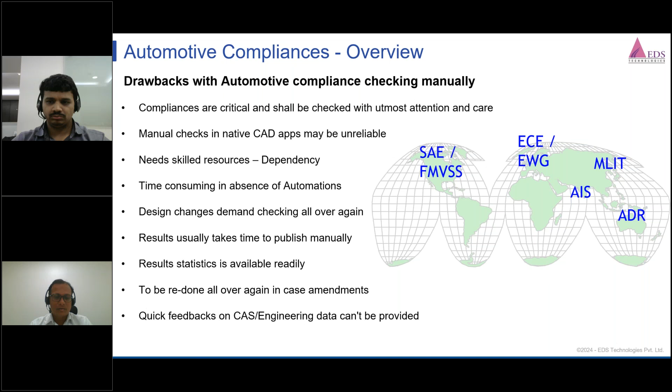Next are the bumper, hood and fender regulatory zones for minimum radius checks. Then we have vision, interior vision and mirror vision requirements in CAVA. And we also have wiper at the top. So CAVA can have all these checks right from the beginning up to the homologation stage. CAVA can support you with different modules, of course.

CAVA can really start from very early phases of development, like from the layouting stage, when you have just SGRPs and layouts of the vehicle, and you have just CAS arrived, and you want to give some early feedback to the styling team, or maybe the engineering team, the supplier team, or the safety team, whether the CAS is really compliant or not. So CAVA really starts from that phase, and it goes up to the homologation phase. It can support you all the way up to the homologation phase.

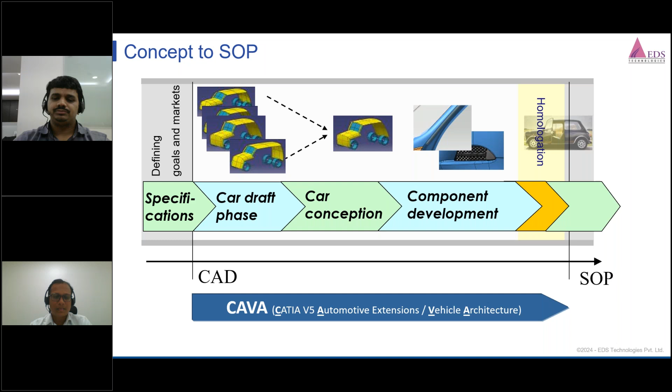As I said before, CAVA has different modules to cover the different areas and the many critical regulations. So first and foremost, what we are going to see now is the CAVA overall vehicle architecture. CAVA has amazing features for architectural designs, which we'll see in the next couple of slides.

So here's the road clearance surface, which comprises the basic surface that you see in the yellow wireframe. That is readily available in CAVA with just a few parameters, and this can be an excellent source of input to many underbody engineers, for example, the harness team and also the underbody team. We have built-in SAE templates for mannequins, which you can place on the SGRPs of the front and rear passengers. You can really study a lot of areas like knee room, leg room, head room, etc.

As I said, mirror vision, rear view vision, is one of the capabilities of CAVA. CAVA can literally certify on the go whether, with this size of the mirror and those adjustments, your mirror is really compliant with the regulations or not. Then there's close range visibility, which depicts test specimens, test cylinders, moving around the vehicle, and it can specify whether they are visible from the seated positions or not.

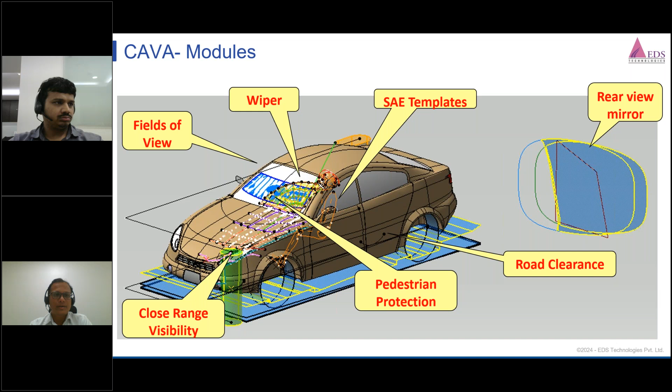Then it has field of view, which is where the whole vision criteria and vision classification starts from the vehicle interior. So it can plot a field of view directly on the windshield. From that, you can also simulate wiper regulations directly on the windshield. And of course, from the exterior side, we have the pedestrian protection feature, which can plot a lot of WAD lines, wraparound distance lines. It can also give you the pedestrian offset zone, which can be very helpful for the underbody engineers.

With this, let's move ahead. CAVA is equipped with a lot of built-in national and international standards. And recently many AIS standards were also implemented in CAVA. We have the Federal Motor Vehicle Safety Standards for the North American region. Most of the Europe region is covered with the ECE standards, MLIT, the Japanese standards, and of course the Australian regulations are there.

To name a few, here are some samples of which regulations apply to which components: rear view mirrors, seat belts, bumpers, some mannequin tools like ellipses and head forms, field of view, head impact. We'll see them one by one as we go forward.

So CAVA is built on one architecture. Performing CAVA studies in the digital space basically starts with CAVA base data. We declare some parameters in the very early phase of the studies. After the base data is created, we subsequently start the further studies, be it OVA, vision, mannequin, safety or wiper. So creation of base data is the first and foremost important thing to start the CAVA studies.

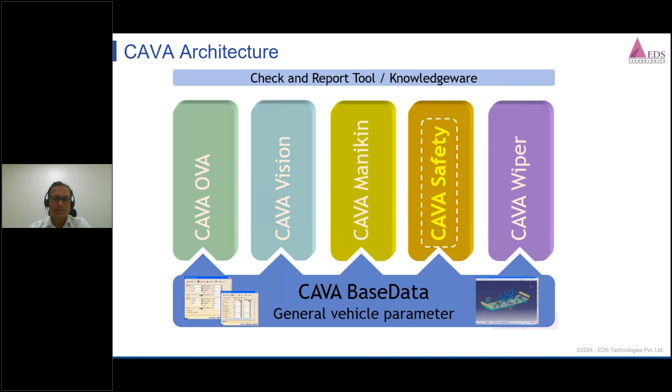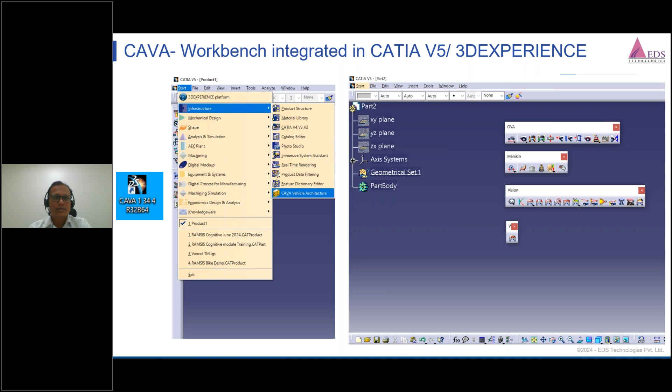Interesting side: how does the CAVA workbench look? This is a CATIA integrated version. CAVA is integrated in CATIA and also in 3DEXPERIENCE; that integration is available at the moment. The far left is how the CAVA icon looks on your desktop. The second image is where the CAVA workbench can be located in the workbench tools. And this is a typical CATIA V5 workbench with CAVA toolbars available. That was a brief introduction to how the CAVA workbench looks. It is not very different from the CATIA workbench, of course.

Let's talk about the CAVA base data. With CAVA base data we can start the creation of the actual studies. We start with base data creation.

For base data creation, we certainly need some important architectural inputs. Not all, but a few are certainly needed. First and foremost, whether it is a passenger car or off-road vehicle, that declaration is really needed. Then you need front and rear wheel center locations in vehicle space, and tire radius and tire static radius are required. Gross vehicle weights, curb weights are required to be declared, not absolutely mandatory, but good to have. Then seating reference points, accelerator heel points, seat travel, and pedal reference points, or ball of foot, that is required to be declared. And seat back angle is also required to be declared at the beginning.

With this base data creation, we move forward and perform individual studies in CAVA. First is the vehicle overall architecture. Before we jump into the detailed technical discussion, let's take some use cases, typical safety cases where CAVA can support you and how to do better engineering. So let's run the first one.

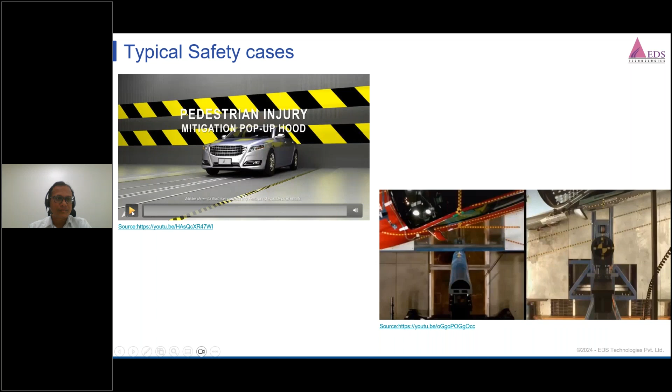It is actually about so this is the active hood and the pedestrian injury.

How the pedestrian leg impact, knee impact, and head impact for the adult is performed. This is a realistic demonstration, but the same can be done on CAVA. So here the presentation was with the active hood. There is a possibility in CAVA to simulate the active hood capability also.

In the second case, we will see how the

side pole impact test is happening here for the two competitor cars, and the structural performance is checked. The takeaway point is that the location of the impactor with respect to the vehicle SGRP point is very important, so that CAVA can support you by showing where the impactor and the pole are located in the vehicle space, so that the structural performance of the door shell and the door intrusion beam can really be ensured.

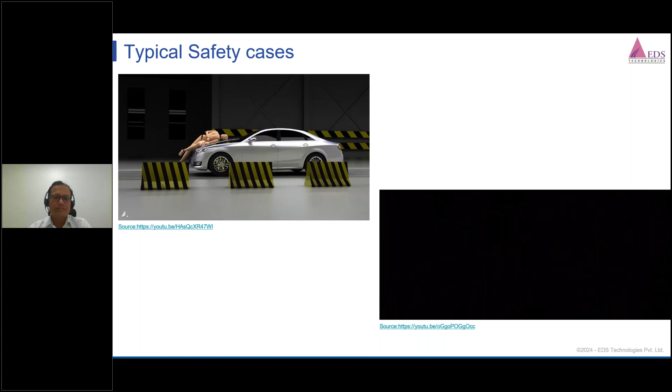With this, let's take one more thing, very interesting for the bumper design, maybe for the exterior design. There's a car coming up with certain bumper conditions here, and it is clashing with the leg form, the knee form here, and it has completely cramped and deformed the hood, meaning it has injured the pedestrian quite a lot. It looks from the deformation that the pedestrian is really impacted. However, if you see the right bottommost vehicle condition here closely, it is quite different than the first one - there's impact absorption here. That has all been done with the help of position-intelligent design in the bumper, and the position of the knee with respect to the bumper.

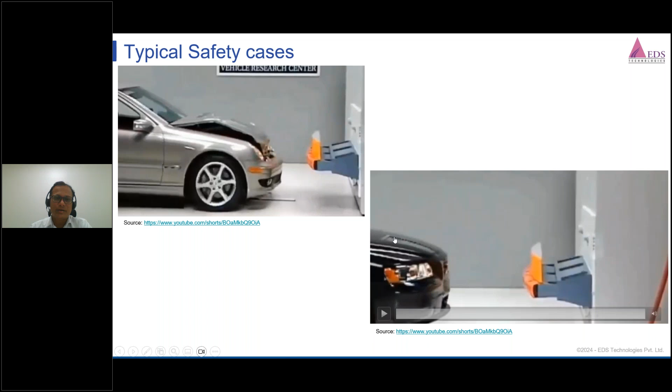That's how, if you see this type of hood, the nose is actually called a soft nose design. That's how many car makers now are going ahead with front bumpers with soft nose designs, keeping in context minimum injury to pedestrians. CAVA can simulate this, the location of the bumper and the knee impactor, so that you can do intelligent designs in the bumper, like the position of the foam here, the impact absorption foam, so that there are minimum possible injuries to the knee impactor.

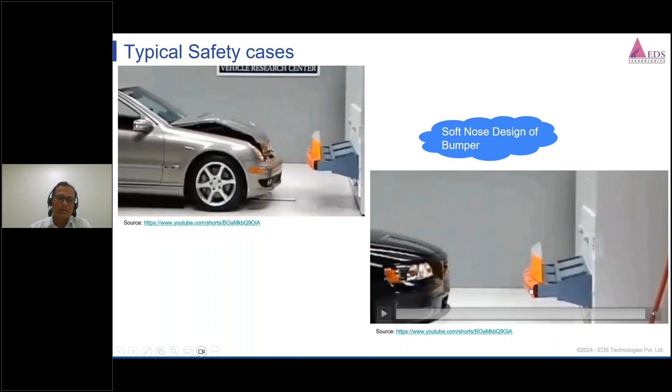Here we start our real discussion, like the OVA, overall vehicle architecture. CAVA can readily create a lot of interesting surfaces for front approach and departure angles - this is approach angle. With the given base data creation, it can certainly create the front approach angle. Now, there can be different tire combinations in a vehicle, like R14, R16. So you have to take all this into consideration, and you can derive two types of approach angles, minimum to be possible to be adhered. So these surfaces are readily available to the engineering team, bumper team, and also the front-end engineering team as a ready surface, so that they don't cross these architectural restrictions.

Static curb radiuses and static curb heights are automatically created in CAVA. With the given base data, it can create a surface altogether with a curb. Curb is where we go on the curb and strike it. So there is a possibility to strike the curb, and certain vehicle details have to be protected against the curb strike. CAVA can generate these surfaces readily on the go, so that none of the body engineering or vehicle engineering crosses those limits, and thereby there's no chance of any impact in the road vehicle.

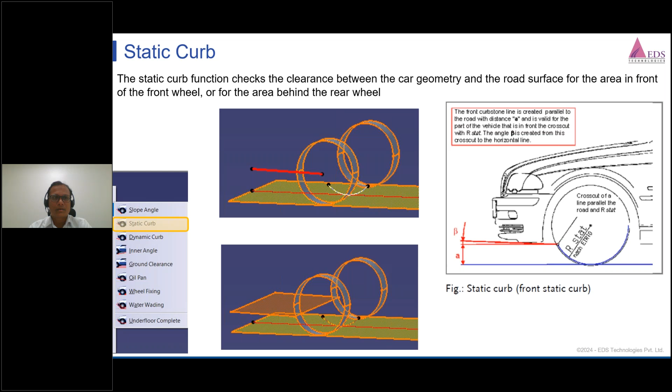Front and rear approach and ramp angles are also possible to create readily in CAVA. You can create these surfaces, very important for the underbody engineers and also for many other purposes. The beauty is that it's available as a surface, so it can really be referred to by many engineers for their day-to-day activities in underbody engineering - maybe for pneumatic piping, harness routing, or other purposes. So these surfaces are really important.

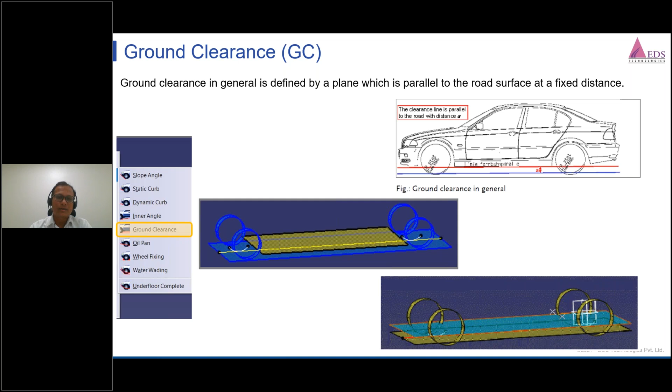Ground clearance studies with the given conditions and regulations allow us to create a ground clearance reference zone, which is very important for underbody engineers for many purposes. The bottommost points shall not hit any stone strike or road surfaces, so these ground clearance surfaces are readily available in CAVA and can be made available to many other architectural engineers, especially underbody engineers.

Oil pan clearances are important, as we still have internal combustion cars where the oil pan clearance must be protected, since the oil pan's height should always be more than the ground clearance. These surfaces shall be readily available to all underbody engineers, especially front end engineers, so they know the different clearances and can adhere to them without disqualifying these regulations.

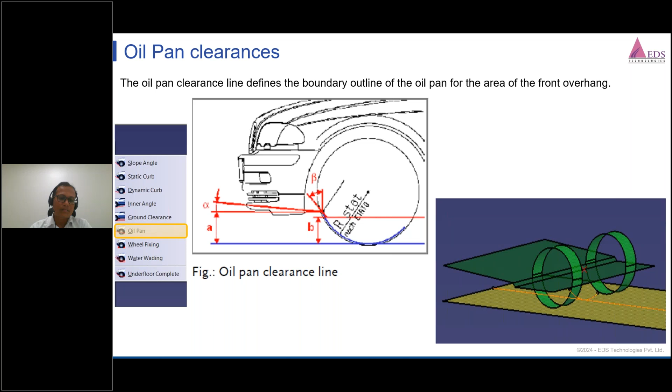This is very interesting: in the finished good condition, when the vehicle leaves the company and goes to the dealer, it travels long distances, so it needs to be secured in a certain way. Certain areas on the body shell or underbody shall always be free from undulations, obstructions, and distractions, so that CAVA can plot surfaces directly on the underbody showing it's completely free of hindrances, allowing the car to travel efficiently to the dealer without damage. Since it's finished good inventory, it should be protected in the best manner possible.

Water wading levels and water wading heights zones can be plotted directly in CAVA. Normally 300 millimeters of water wading depth is protected for any vehicle, however in North America this is around 400 millimeters, more than 1 foot. These water wading levels are readily available so you know your wet zone and dry zone, which is very important for corrosion protection engineers so that extra protection can be done on the underbody in the wet zone area. CAVA can plot this very readily on the go.

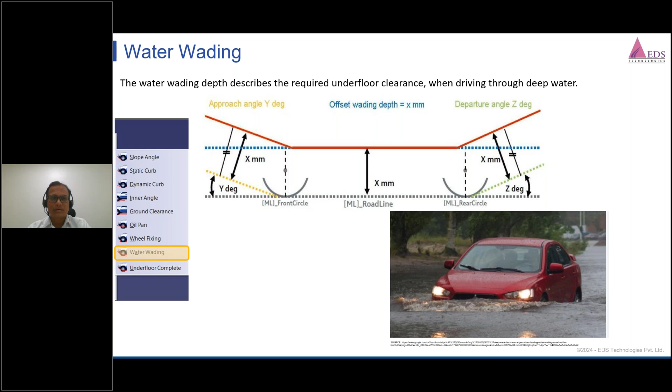Lamp position certification specifies that the lamps and illuminating surfaces are placed with respect to a certain height from the ground and inboard from the extremities of the vehicle. These vertical and horizontal lines are readily plotted in CAVA, giving an indication of where your lamps shall reside or be located, which is how we meet the lamp certification.

It can also check your existing lamp position and certify whether it meets the regulation, for example the European regulation R48 revision 4. It can certify whether the lamps meet this regulation or not on the go, giving you a digital confirmation directly in CAVA, so you don't need to refer to the entire ECE regulation standard, which is more than 100 pages, since CAVA can certify this directly in the CATIA tool.

Lamp position is of high importance because it has a very high critical impact on underbody and front end engineering, and also packaging, because the headlamp housings protrude quite long on the backside and consume a lot of space. So it's good to certify the lamp positions from the very early stages of development, and CAVA can quickly simulate and certify your lamp positions directly.

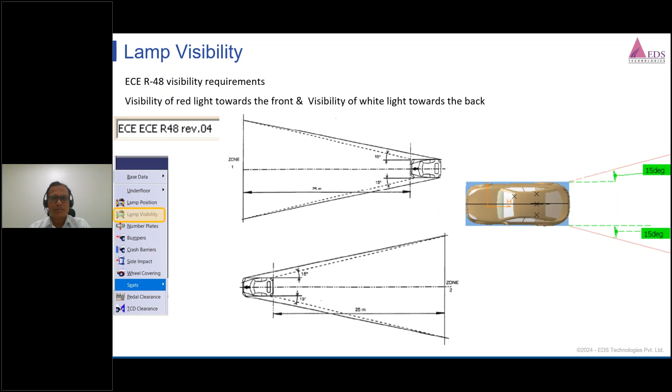Number plate regulations differ across continents like European, American, and Asia Pacific regions. The number plate positioning must meet certain height, width, and minimum distance from the ground plane. All this can be readily checked in CAVA depending on different regulations, which is very important. Otherwise it takes a lot of referring to European or American federal standards to know the minimum ground heights for number plate location. CAVA does it efficiently and quickly. Number plate certification.

Whenever a bumper skin is released from the cast, the first activity bumper engineers do is certify it for many regulations, for approach, leg impact, etc. CAVA has a tool to certify your bumper designs. It checks ECE R42 regulations efficiently and can certify your bumper designs on the go, ensuring certain areas of the bumper are intelligently placed so there's minimal impact to the knee.

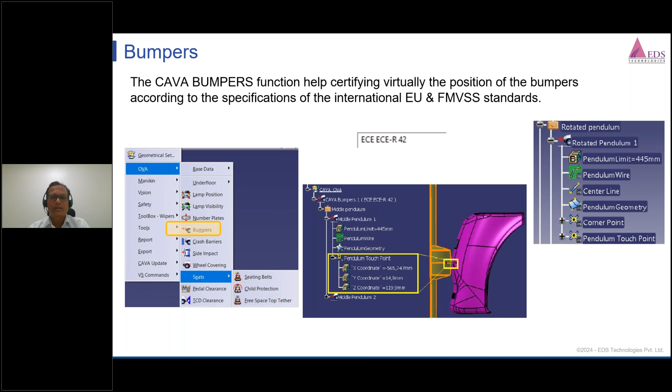CAVA can also package and give a very probable location of the bumper beam, which is the crash beam in the vehicle structure. This is a very important location for meeting many crash regulations. If you move the bumper beam somewhat up or down, it completely changes the crash behavior of the vehicle, so it has to be placed efficiently from the beginning to meet crash criteria.

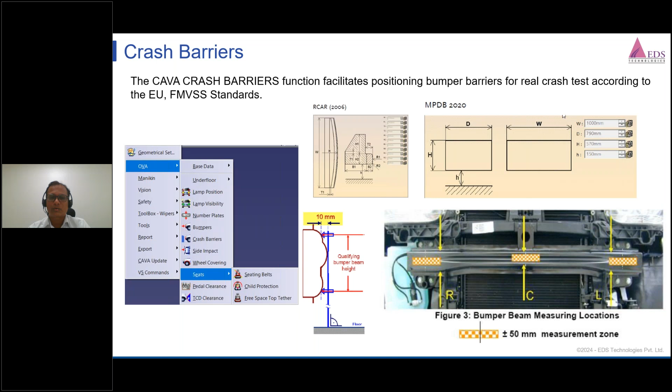Side impact, as shown in the video in the first slides, was the pole impact from the side. Knowing the pole position with respect to the SGRP is of high importance, because only then can we do body and door engineering well to protect against that impact. Side impacts are more crucial than front impacts because the impactor location relative to the mannequin is closer. So intelligent body engineering should be done to avoid intrusions. We can engineer our intrusion beam designs accordingly if we know the pole position relative to the SGRP, creating surfaces directly in CAVA to give to the door team so they can refer to it for body engineering.

Wheel covering is also a safety and regulatory feature in Europe and India. If you look closely from the front, some portion of the bumper always covers the tire from the top. The tires actually go inside the fender for safety reasons, so pedestrians don't get injured by rotating tires. This regulation's triangular zones or limiting zones can be readily calculated in CAVA, which is very important for fender and bumper engineers.

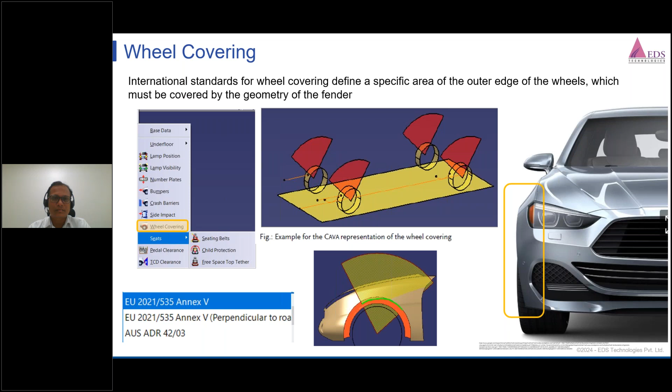Seatbelt zones are regulatory zones. The top anchorage and bottom two anchorages fall under regulation, so the body must be protected, and it's a day-to-day job for architecture engineers to ensure anchorages are certified and the location is certified. CAVA can give you different zones of top anchorage, with the full zone shown so you can choose which works best for you. There may be a zone here, but your B pillar can run from there, so you can choose a different zone. Knowing these surfaces is good practice and important for body engineers to know where to locate belt anchorages. CAVA gives you these ready-made zones on the go, and also tethering and protection zones for the rear passenger and child.

Pedal clearances: CAVA supports manual and automatic transmissions. It can certify your pedal geometry and footwell geometry efficiently, checking whether the pedals have certain width and spacing between them. It gives you a color-coded graph showing which dimension is meeting requirements and which is not, so you can take necessary action to place them accordingly. Otherwise, doing this manually is time-consuming, and some engineers who don't know how to measure the normal distance might pick a random point incorrectly. CAVA completely takes care of that risk of manual intervention and errors.

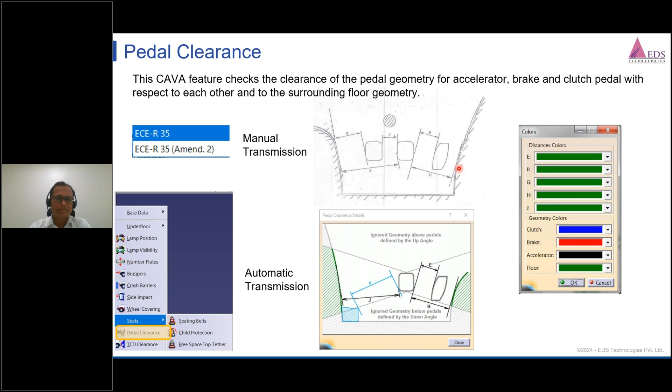That was mostly CAVA, mostly OVA, overall vehicle architecture. We'll start CAVA Manikin here. The first one is availability of ready-made eye ellipses from the seated position. Now, knowing ellipses and creating ellipses is a quite time-consuming job in native CAD, maybe CATIA or Unigraphics. So in CAVA, just with the base data, you can readily create the ellipses, which can be further used for many vision studies like A-pillar obscuration for forward visibility and also side visibility.

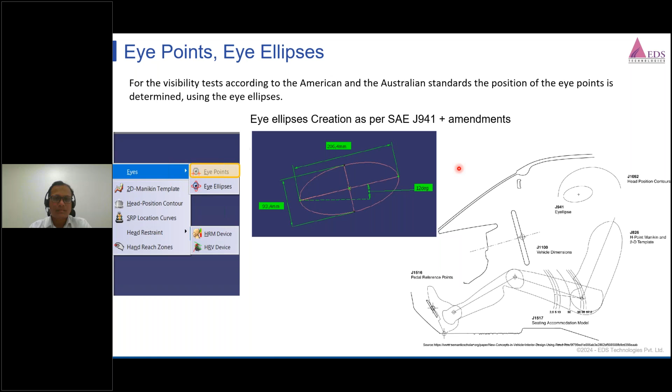Again, the head impact zone can also be created equally well in CAVA, quite fast with the creation of base data, so that you know whether your head and roof geometries are very close or not. These surfaces can be exported to the interior engineers, maybe roof engineers or headlining engineers. And this becomes very important to know the head position contour when you have height adjustable seat designs. There is certain Z travel on the seat, so you can take these values and set up your roof structure and roof headlining accordingly.

In the seat, there are some criteria: the head restraint needs to be certified for certain height and horizontal distance criteria from the mannequin head. FMVSS 202A states those requirements. So in the seated position, CAVA can take your head restraint geometry and certify that it meets certain regulatory criteria.

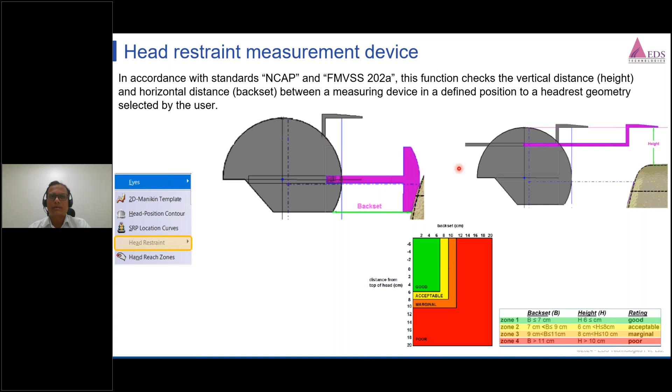Hand reach zone is very important for the IP and cockpit engineers to place their controls, utilities, buttons and infotainment system, so that they are touch-worthy points on the IP and cockpit. CAVA can give you three hand reach zones according to SAE J287 quite quickly. There's a three-finger zone, to operate some radio buttons or temperature control on the heating or cooling system. It gives a full hand grasp zone also, and extended finger also.

There can be some push button kind of thing, which is usually operated by one finger. That's called extended finger grasping. So with these three readily available surfaces, there is no ambiguity in the mind of the cockpit engineer about which controls are within reach and which are not.

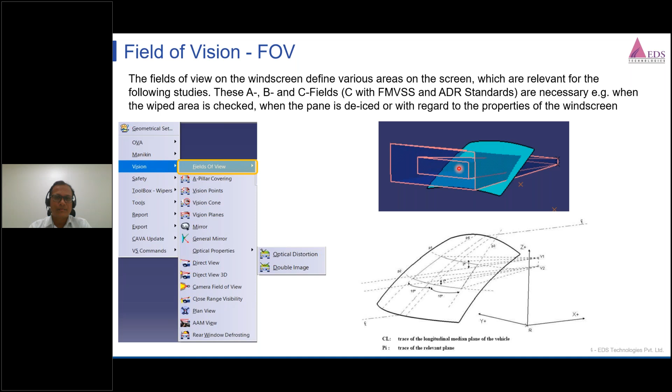With that, let's take a look at the CAVA vision capabilities. First and foremost, the CAVA vision study starts with the creation of the field of vision. With the seated position and the declaration of the base data, CAVA can plot these vision cones directly on the windscreen, which is the start point of wiper calculations. Certain areas of the windshield should always get wiped from the seated position. So CAVA can plot these areas directly on the windshield, which are subsequently used for the wiper simulation.

A-pillar obscuration is like a blind spot identification. It's a regulatory element again. The A-pillar should not cross a certain binocular angular obstruction, so that there is no risk of missing an outside pedestrian or object and thereby driving over it. This binocular obstruction has a limit of 6 degrees according to regulation.

So CAVA can take your A-pillar geometries and also trim geometries, weather strip geometries, taking everything into account. From the seated position, it calculates the A-pillar obscuration angle. It gives the current obscuration angle value. It's very important because it's a blind zone for the driver.

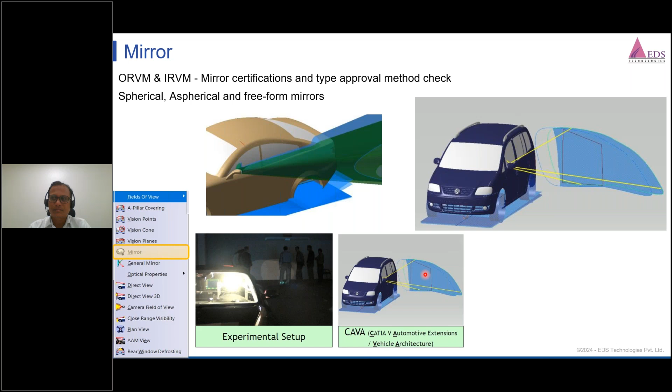Mirrors. CAVA also has a possibility to simulate reflection analysis on the windshield, because reflection is actually an annoying phenomenon in the interiors. It can be daytime reflections, it can be night reflections, but they are dangerous. So technically, whatever is on the IP or cockpit, everything is capable of getting transferred and reflected onto the windshield.

However, we should always package our positioning of the controls and buttons, etc., quite intelligently, so that at least they are not in the visibility zone or field of vision. They are away from that. So this study is very important for the architecture engineers to perform this reflection analysis, so that there is no surprise when the vehicle is put to the condition.

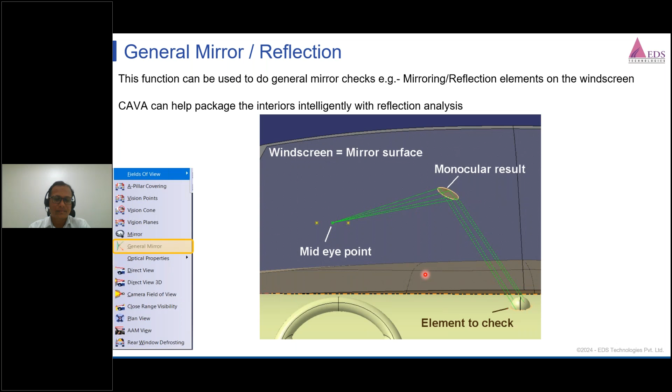As I said, close range visibility places some test specimens resembling child occupants, child pedestrians, and certain zones of the child, or the cylinder, should always be visible to the driver from the seated position. That is the condition put forward by the regulation. So CAVA can certify this geometry, this regulation, automatically in the close range visibility module in CAVA.

There's something called GCIE, Global Car Information Exchange Forum, where we can compare or know how far we are on the vehicle's 360-degree visibility, how much is the percentage of blind zones on our vehicle. So CAVA can take the whole car geometry and the daylight openings, without the glasses of course, and it can give you this pie chart.

It's not a pie chart; it's actually a visibility zone, with the red sectors representing the blind zones from the driver seated position. So CAVA can plot this plan view, what we call it, and it's also helpful for comparing and benchmarking purposes.

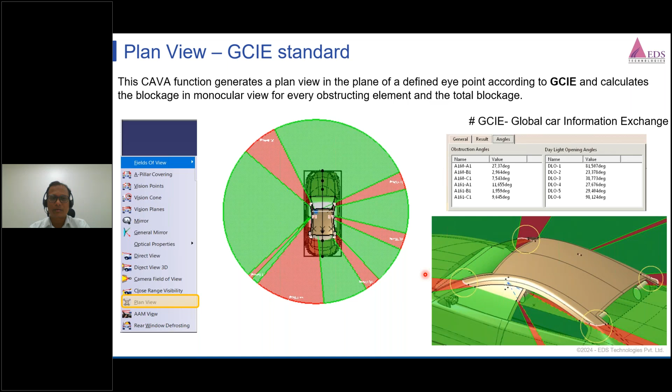I think let's move to safety, which is actually one of the top modules of CAVA. It's highly recommended and highly used worldwide. It has certain features that are outstanding in nature. Like the very first video of the presentation, we saw the dummy hitting the head on the hood. So CAVA can generate the WAD lines, wraparound distance lines, on the hood. It can generate bumper lines, lower bumper, upper bumper, hood lines, etc.

So it is very important for underbody engineers to know this surface, because they should not allow their suspension towers or any kind of NVH stays on the underbody or the engine bay area to cross these limits. It should always stay beneath that level, so that there's ample room from the top side for the energy absorption.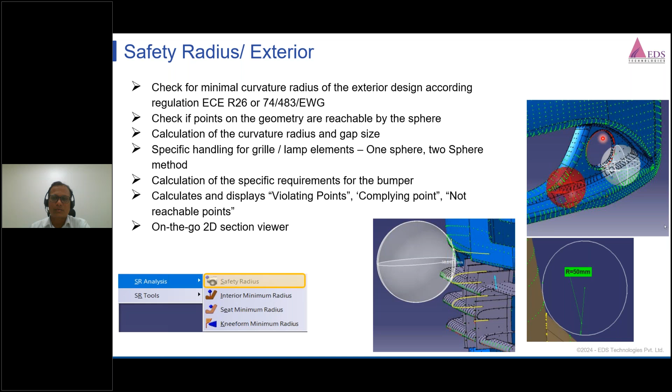In the interiors, we have similar requirements for head impact zones, minimum radius requirements on the bump for the dashboard and the door trims, and also on the A pillar. So CAVA can give reference zones. It can give you the head impact zone for the driver and passengers, as you see in the right side images.

And it also takes care of the excluded area, called steering wheel offset, and it can also create an LIP directly on the dashboard. This line is the level of instrument panel, running from here. So everything above is under purview of the head impact, and for anything below, the knee injury criteria applies to the lower zones.

So CAVA can certify your dashboard areas, which are sometimes quite critical, with intricate details in the IP which need to be certified efficiently and well so that we don't see any surprises. Because based on this feedback, we go ahead with CAS finalization and CAS confirmations, and we then start our trims engineering accordingly.

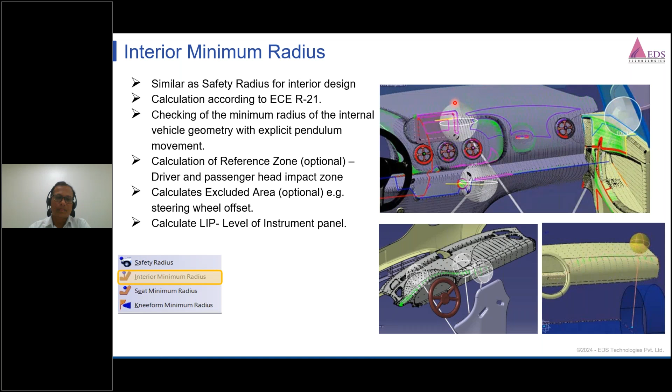Just like interiors, apart from many other regulations on the seat, like seat belt anchorage, seat belt strength, head strength, etc., there is a minimum radius requirement on the seat also, which is regulated by ECE R17. It divides the seat into three zones, 1, 2, and 3, and for all three areas there are certain minimum radius criteria that need to be met.

So CAVA can take your whole seat geometry, and it can certify whether your seat geometry meets ECE R17 or not.

Knee form, as I said, below the level of instrument panel is under purview of the knee impact zone. There are two methods for the knee impactor, the straight way and the inclined way, and both can be used for checking. Whatever black spots you see are valid points, but not touch-worthy points. Green points are compliant, and there are certain red points which are touchable and not following certain radius parameters.

So naturally, these are the action items. The cockpit engineers can refer to these and do their design modifications accordingly. And they can also suggest the styling team correct the designs or the surfaces here.

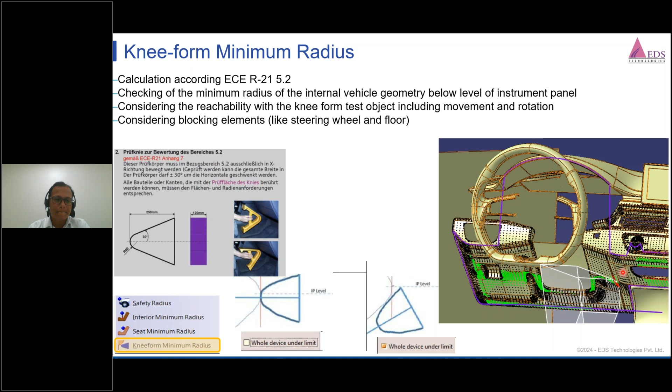Last is the CAVA wiper module. I think we are at the last module of CAVA. CAVA has a wiper application which can simulate your wiper wiping calculations directly on the windshield. It can simulate different types of blades and geometries. For example, there's a standard blade found on almost every car, and there are trapezoidal and 4-bar linkage wiper arms, and some parallel arms also.

So CAVA can take any geometry or any type of wiper arm and simulate it. So it certifies your wiper designs, and if it is not meeting, you can think of increasing your blade length or your arm length, and then meet the criteria of wiper regulations.

So here we see another feature. CAVA goes quite deep inside wiper calculations, and it can also predict your wiping quality. Wiping quality depends upon the attack angle, which is mentioned here. The attack angle is the angular deviation between the axis of the wiper blade and the normal axis to the windshield.

Technically, it should be zero, but keeping it so is not really possible due to the curvature of the glass. So there is a limit on how far we can deviate from zero on the attack angle. All the red points here have deviated beyond that angle, which means the wiper blade can twist really badly in that area and will not wipe the glass properly. So these areas should be properly checked for their attack angles.

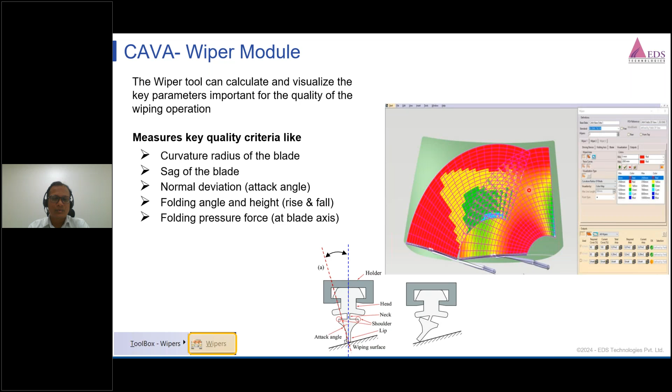I think that was the last function from CAVA Wiper. Let's take who globally and in India use CAVA. Mostly all European car makers and American car makers do use CAVA for their day in day out activities in the architecture area. And also in India, we have a lot of customers, a lot of big players who are our customers for CAVA, doing a lot of things in CAVA, from architecture to certifications, etc.

So they want to be double sure that when they face the certification, they should not face any surprises in the certification stage, because if something goes wrong in the certification stage, then that calls for an extreme time delay that can impact your vehicle launches. And if it is due to supplier mistakes or something, then the OEMs can really impose a big penalty, because they can't meet their planned launches.

So as I said in the very first title, regulations are critical. They should be done with the utmost care. They need highly skilled manpower to carry this out. But CAVA resolved all this with this tool, so you need not worry about all this, and all this risk is taken by CAVA itself to certify digitally everything on the go.

So Mahindra is our customer in India. There are many customers in India who use CAVA day in day out. You see many big names are there. You have Audi, BMW, Ford, Mercedes, Skoda. Volvo is also a global customer for CAVA.

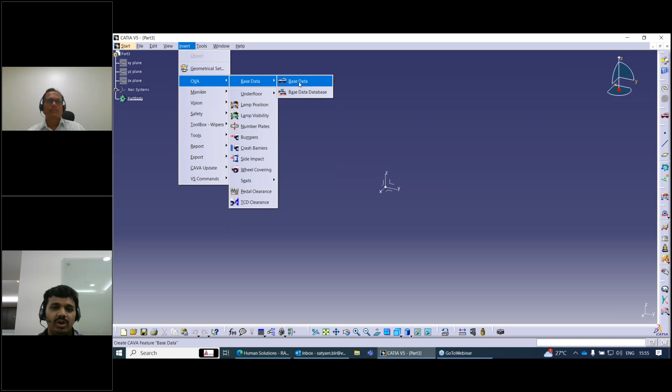So here we have something called CAVA. In CAVA, we have something called base data. Base data is a set of parameters where we add the loading parameters, the vehicle wheel parameters, seating parameters, and the category of vehicle it is. The moment I click on base data, you can see by the click of a button it is creating one baseline, and here you can see the vehicle category.

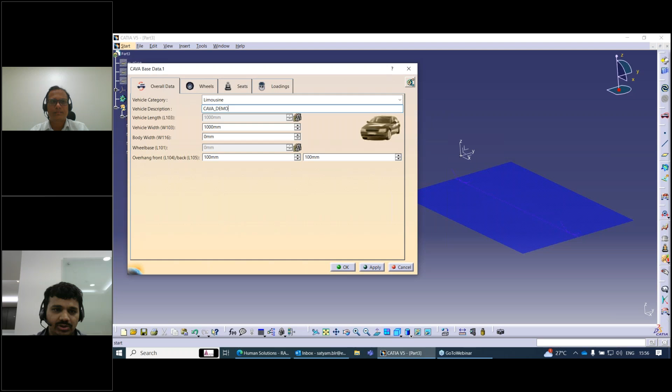Now, for example, I have off-road and limousines. So now I'm selecting limousine, or I can give any vehicle name description, for example, CAVA demo, and then I can change the vehicle width angle, the overhang front and back. So there's something I can change here, and then I can give the vehicle wheel details. Now, for example, I want to see where exactly my wheel is lying if I'm making any change to it. So I can click here in the visualization. I want to show it by wire and face.

So I can just click on that, or I can go with the points as well. And then furthermore, if I want to edit any parameters with respect to my static radius, diameter, width, for the wheel camber, for example, in and out, for toe in, toe out. So any degree I want to make, basically we see for industrial vehicles, for example, tractors or the pickup loads, they have something called camber in, camber out. So we can add here also the wheel to analyze the further details.

So further with that, we have here seating geometry, seating details. So here we have to select the seat, the SRP seat points. So if you have the seat point, you can select, or you can simply put the coordinate here. For example, if I'm putting 115, let's say minus 116, and then 170. And I can just click on the button. I can add it here somewhere. You can see it's been created here, and if I know my proper seat reference points, I can just create by these values.

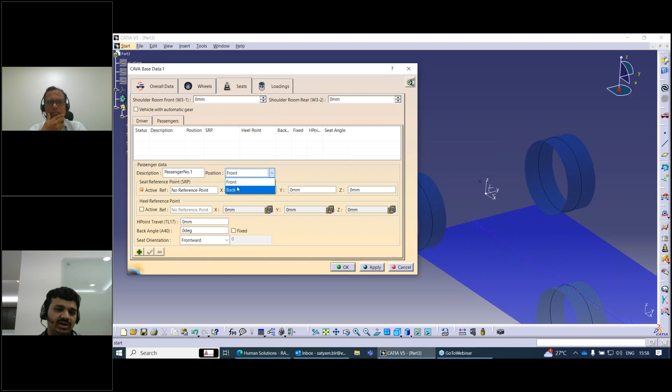Further to that, we have the individual type. Now, whether it's an individual seat or it's a bench seat, that's something again I can select here. And this is for the driver. Further, if you want to add the passengers, again you can add the passenger for the front as well as for the back by putting the coordinate of the seat SRP point, or by selecting the SRP point like this, which I'm selecting now. So it's automatically selecting as SRP points. And the orientations: front row, back row, left, right corner, all is custom.

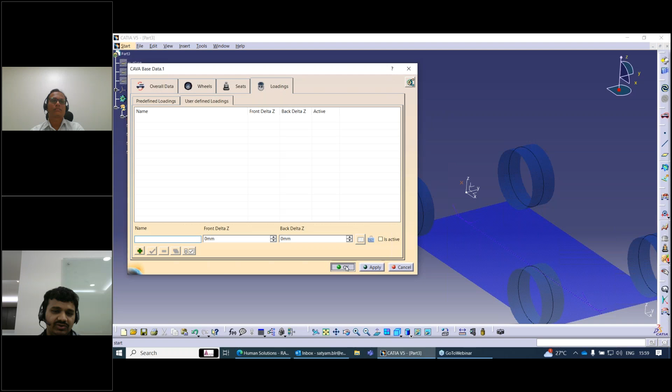Then following with the loading parameters. So now here we have the loading parameters. If you have the vehicle curb mass or design mass, or gross vehicle mass, or empty loadings, with respect to the different standards. It could be your FMVSS, it could be your MLIT, or it could be your ADR, or EC. So those parameters you can define. Then if you have your own parameters, for example, your own company parameters, we have something called user defined loading. You can add it here. So once you have done with these things, you just have to click OK, and your base data will be ready. That's how simple it is.

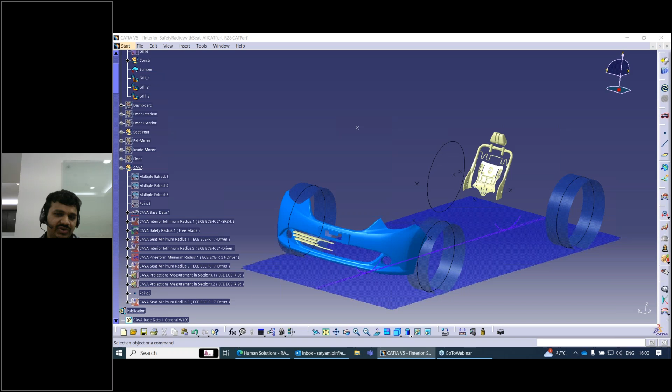So I hope my screen is visible to everyone, right? Yes, yes, Satyam.

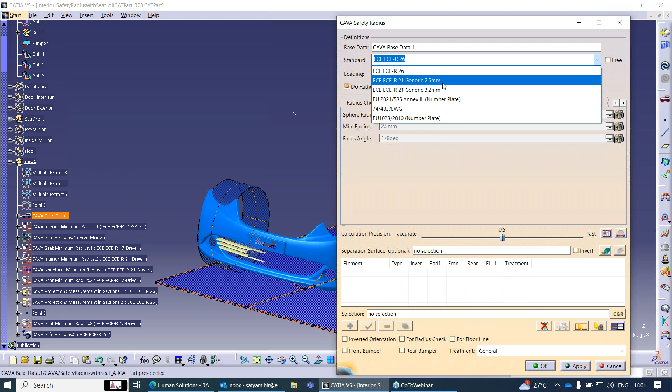So now further, I'll give the input parameters. Once I click on the safety, you see one dialog box has popped up, and in this dialog box, first thing first, you have to define your base data. Select your base data which we have created, and the standards. We have various standards. So as of now, for example, I want to do ECE R26 or ECE generic 2.5, where the radius would be 2.5. Now here we have the radius check and the bumper check. So I want to click on the bumper check as well.

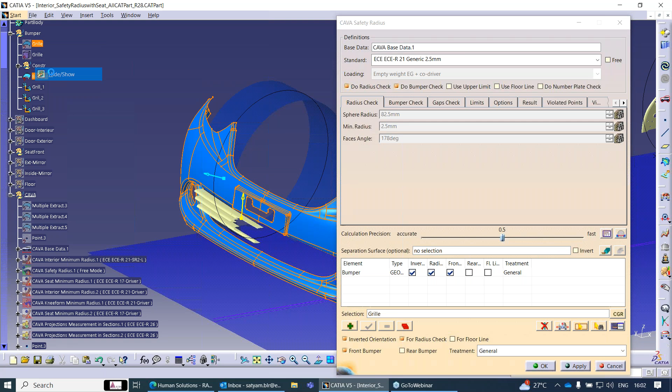Similarly for my beams also, like for my grills also, I'll simply turn on my grill. So I'll select my grill as well, and again here I'll give the treatment from general to grill, and this would be a front bumper, and then I'll check the invert, so it's pointing towards the camera. So I'll add it here.

Now, for example, I added here, I want to check whether everything has been sure or not. So we have something called surface orientations to check the orientations whether it's correct or not. I can run the surface orientation here as well. So you can see now all the points are pointing towards the camera, which is good. If there's any false, it would come away from the camera. So just click OK, and once I've done that, I'll simply click apply.

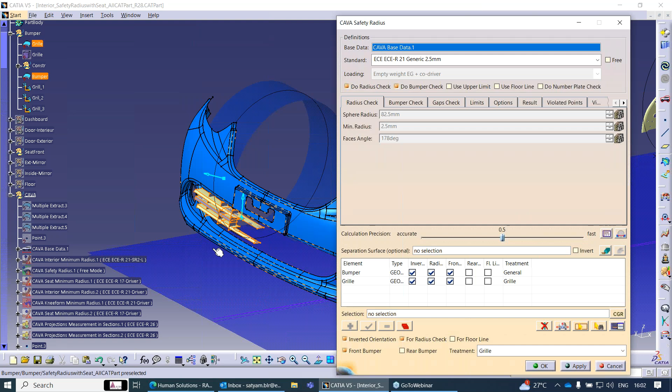It will hardly take 2 minutes to analyze, or less than 2 minutes to analyze the entire bumper. Also, you've seen the precision which I have kept. I kept it on 50%. The lower the precision number, the lesser time it's going to take to iterate the process.

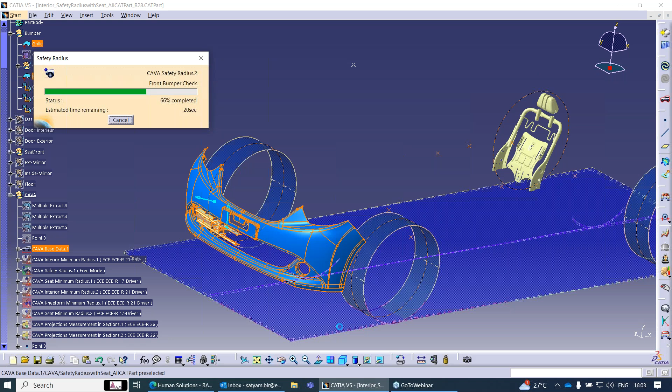So yeah, you can see it's completed within a fraction of minutes. And you can see, as in the presentation also, when we talked about safety, we've seen the green area and the area which was not reachable shown as black, or the area which is violating the safety shown in red.

So similarly here you can also see some of the area just here. You can see some of the violated areas, and all the green points you can see is the pass area, and the red points you can see here is where the surface radius is not passing.

And similarly, if you want to analyze those checks, for example, to check what results have passed or failed, here we have something called results. So in the results, I can analyze for my bumper as well as for my safety radius or the radius checks. So if I go to my safety radius checks, it's completed.

47,092 points, and out of which it's violating 427, and the sharp edges are 16, and the unreachable zone is 23,859. So the unreachable zone, which is not reachable, whenever I want to check it, it will always come under certainly the pass area.

And then further is for the bumper. Here in the bumper, it's calculated 47,116, out of which 890 were the numbers violated below the minimum radius checks, and again its violated points would be the 16 sharp edges, and 23,859 where checks have been done as unreachable zone.

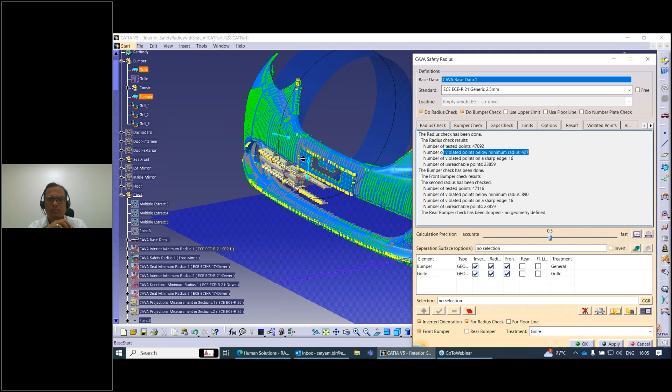So we can see only the difference where we can see here the violating minimum points. Here we're getting 427, here we're getting 890. So rest assured. Further, if I want to check each of those violated points, I can go to the violated points.

So you can see here, and I can click on the radius. I can get the lower value or higher value as per my requirement. So you can see now, if I'm seeing which has the least value, I can click here, and then again I can click here.

And what I can do, I have options. For example, I can create the section also, or show sections, or I can drop the devices. So now, for example, here I will drop the devices. So you can see this is the point where the device has been dropped.

And I can create the section also. So now I can check the sections, and after clicking the show section, I can see it in the section viewer. You can see the values.

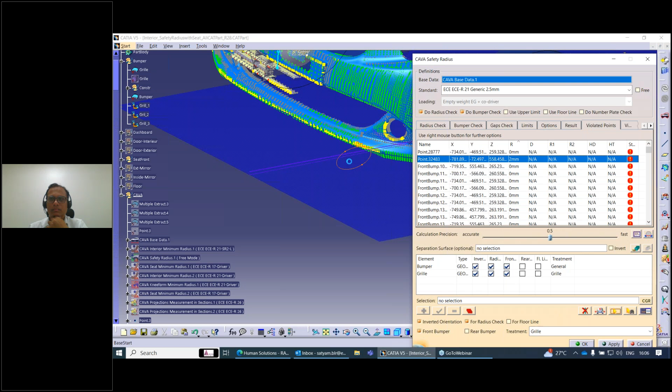Furthermore, now for example, it has a 2, and here again I can show the devices simply. Yeah, you can see this, and then here also I can show the section, and I can see in the section viewer what the values are. Section viewer.

So I'll just change it. Because I already calculated for 2, in the point I can see 2 values. I'll just click on the 32, and it will change to this value. You can see here it's doing the 2-point checks, showing the gap value of 2,

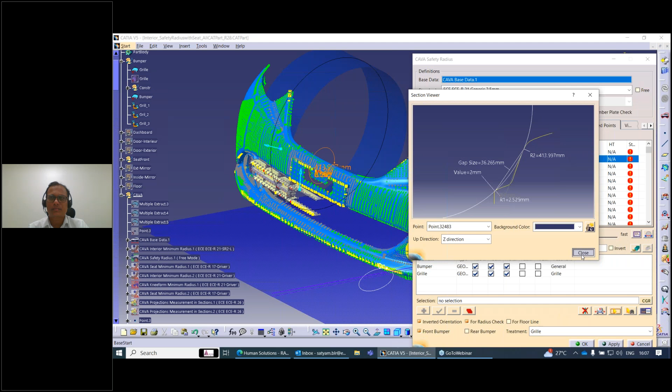and the gap size is 36, for the R1 and R2. I'll just click close this here. Similarly, you can do one thing. Suppose you want to check only the unreachable, or only the violated point or the sharp edges. So we have something called in the visualizations.

If I go here, I can do one thing. I can go into the bumper and radius, and hide all those things here. Similarly, I'll go for the bumper also and hide those things. Now I just want to check the sharp edges and the area which has violated, so I'll just apply here.

So I can easily maneuver my geometry now and see where the violated points are, and check details smoothly, because the rest of the area was passing, the only area not passing is on these lines where it's a violated point or the sharp edges, the red ones.

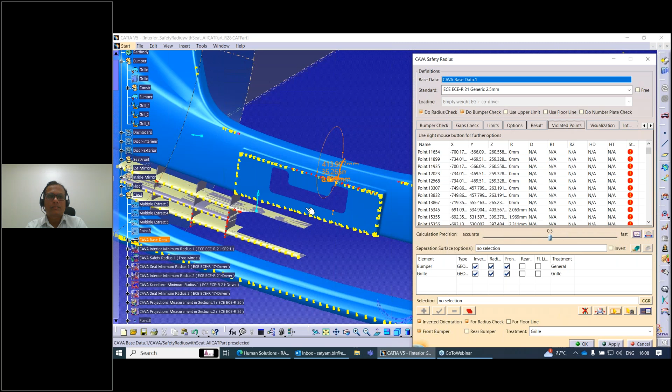Now, for example, suppose I'm going to the violated point and I'm not sure which point is lining which one. So I seamlessly check this point. Now, for example, I want to check this point or this point. So I can just go into something we have called interactive check.

I can go into the interactive check, and click here on start. And for the start, what I can do is I just want to snap it as a grid. And now I want to create it as a section also, and show devices when I click.

So now, for example, I'm clicking here somewhere. You can see I can easily create the devices from here, or maybe I just want to check this one, or somewhere I want to check this one. I can easily drop a device and create the section as well.

Furthermore, I want to check in the section viewer. I can click here, for example, show section now, and I can see interactive checkpoints. So you can see this checkpoint.

So I can zoom in and check this point. Further, I can check this point, and change the direction as well. Now, for example, it's an upward direction, or I want to check in the X direction, or make it an auto direction. Similarly, I can check with this also.

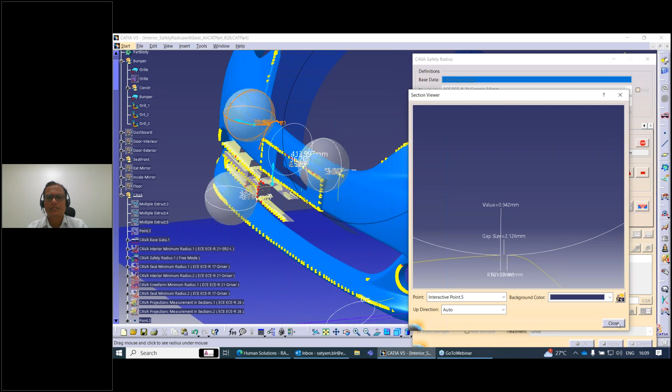Then I can take it as a snap, or create it as a report. Now, for example, this is for the interactive check. I'll stop this one.

Now, for example, if I want to go again to the violated points and create a report, I can simply click here and select all the points which I have. I'll select all the points immediately, so you can see all the violated points have been selected.

And then I can create it as a CSV file, export to CSV. So this file will be exported as a CSV file. For the report purpose, in order to generate the report, I can create it as a CSV file,

or I can do one thing. Suppose there are users who do not use this software, and I want to transfer these points, or transfer this data or something. I can just simply click OK, and then I can do one thing.

Now here I'll go into insert and export. So I want to export this to the non-CAVA users, or the users I want to send details to. I can select this report. Now, for example, I've created this one, and then I have options to export the entire set of geometry also, and the particular feature also.

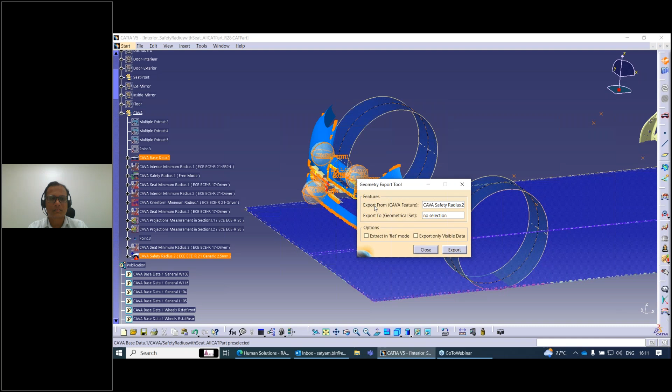So I want to export only the visible data here. I don't want the entire detail which I have calculated. So I'll just click here and export this.

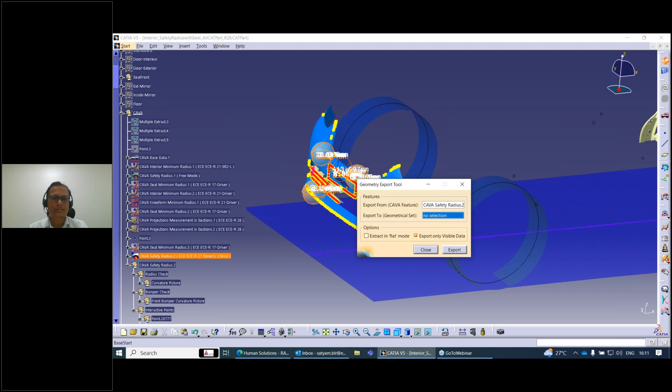So this is where the export feature has been created. But suppose if you want to export this feature for a particular set of geometry, we have that option here. I can select somewhere here, or any other bumper area, and export that particular set of geometry as well. So for example, if I close this, let's hide this.

So whatever points come at the exported point, I can see here, I can see all the points, I can see the measurement devices, and I can hide or unhide this, or edit this file for the particular report generation. Just hide this as well.

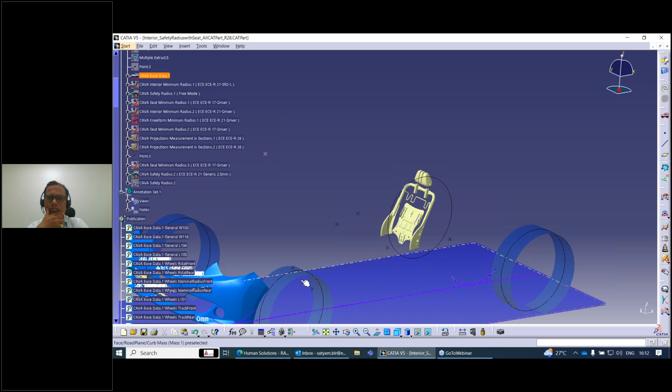So this was with respect to the safety radius. Now further we'll see one more analysis with respect to safety, for the seat minimum radius checks. We often check the seats to see whether there are any sharp edges or not. For that we have something called safety radius, and we have two options: interior minimum radius checks and seat minimum radius checks. This one is specifically with respect to the seat.

I'll just click on the seat. Again here we click on the base data, and after selecting the base data, we have ECE-R 17, or if you are adding any further standard area.

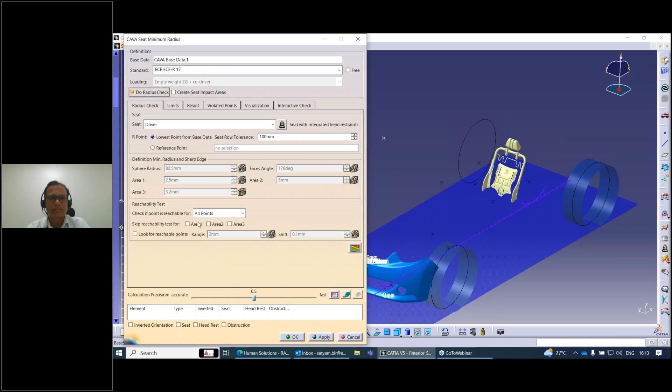As of now I have the ECE R17, and I want to do these radius checks, or create the seat impact area. In the presentation showcased earlier, where impact areas 1, 2, 3 were addressed in color coding, similarly you can simulate here. Now, for example, I don't want to create the impact area, I just want to check the seat radius, so to complete this as quickly as possible, I'll just select this.

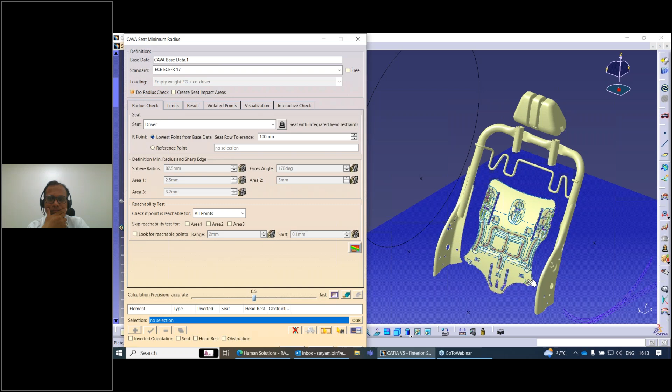So now I'll select the geometry, and I'll check the orientation. It's pointing away from the camera, so I'll change the orientation, mark it as a seat, and add it. Similarly I can select the rest of the geometry, which is also pointing away from the camera, change the orientation, and add this. I'll add this, and similarly I'll add the headrest also.

So we have the headrest option. If your headrest is integrated with the seat, we have that option at the top, as you can see we're selecting for the driver seat. So here we have an option called seat with integrated headrest. As of now our seat is not integrated with the headrest, so I'm just selecting it as separate, check the seat, select this, and add this. So now all the geometry has been added.

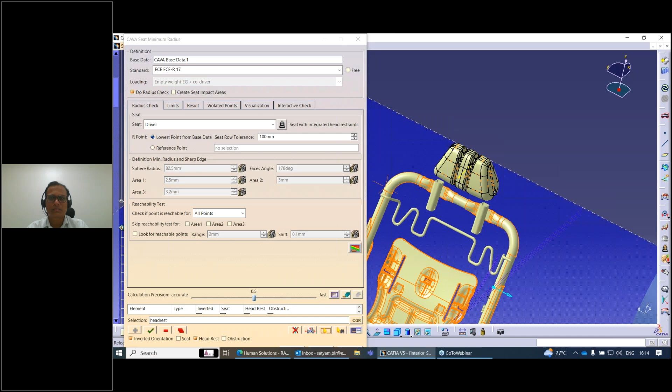Further, one thing I have to check is the seat surface orientation. I can go here. Now somewhere I made some wrong orientation, so let me explain that too. I'll click here for wrong orientation, on the orientation check. Again I'll click, and now you can see one is pointing away from the camera, which I have to rectify. Now I can check this one again, for example.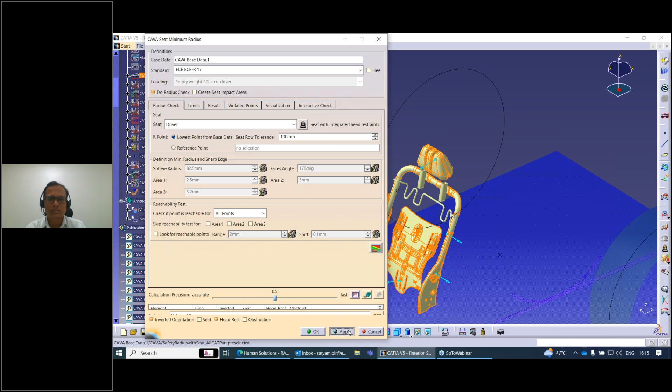Or maybe I can just do this. Nonetheless, it's fine, I'm just going to start the simulation by applying it. It will run on good accuracy of 50%, and within a couple of minutes, less than a minute, it's going to finish the iteration for the analysis for the seat itself.

So similarly to what you saw on the bumper with the pendulum sphere dropping test, you can see the same for the seat interior, where you drop the pendulum and check whether there's any issue or whether it's violating the pendulum points. If any violation occurs, it will be marked red with respect to the standards. So now you can see the green areas, yellow areas, some red areas, and black areas. The black area is the unreachable zone, but since that zone doesn't have any violated or sharp edges, it should be considered safe.

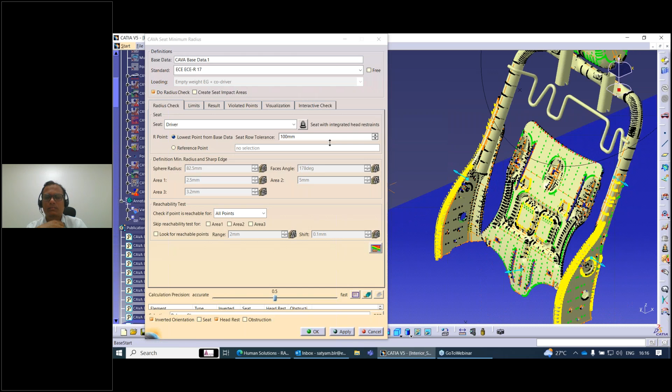And then further here again I can see the results, what checks have been done. So I can see here I have skipped this area, seat impact area. I have skipped the test, and only done the seat radius checks, where 1 lakh 5,026 points have been checked. Out of it, 1,790 were the minimum radius checks, and 2,038 points were the sharp edges, and 87,000 were unreachable.

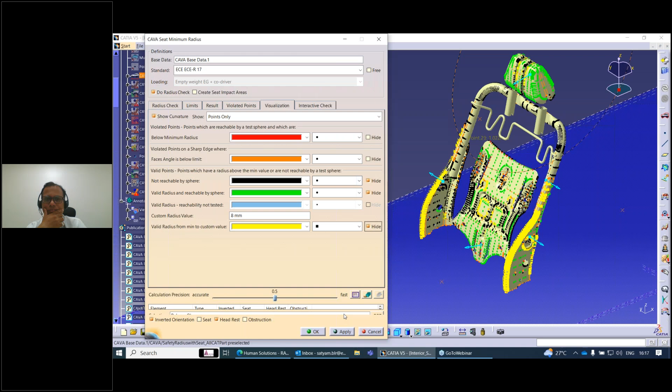So again I can go to the violated points, and similarly I can export the points which I require. For example, I want this point, or I can export into a CSV file, or I can export the faces I want. Now again I can go to visualization, and I can hide the safe zones, for example, which are reached by sphere. And I can just click on the points which are below the minimum radius. I'll just click apply, so it will be easy to find.

So again you can see here, and similarly I can go to the violated points. Now for example, if I'm clicking the point, you can see which point I'm clicking, it's showing here. And then I can do one thing, show devices. So now you can see this device has been dropped here. And furthermore I can show this section, and I can show in the section where I can check this point.

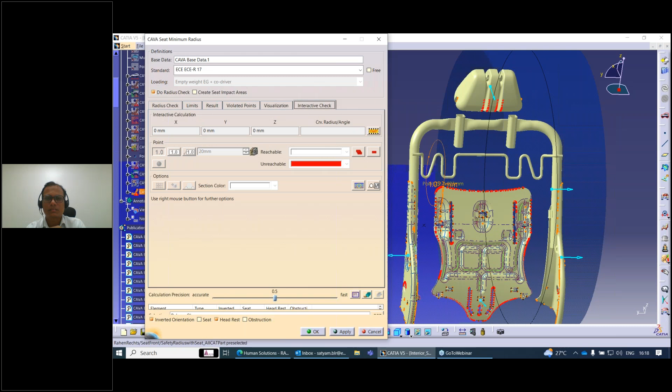So similarly here I can go for the interactive check as well, and analyze my seat easily, without having any issue with respect to the points which I want to use. So I can continuously check each and every one by creating this pair, the same as what we have done for the bumper. So it was that simple to analyze these things. So I'm just clicking OK. Now this is done for the safety.

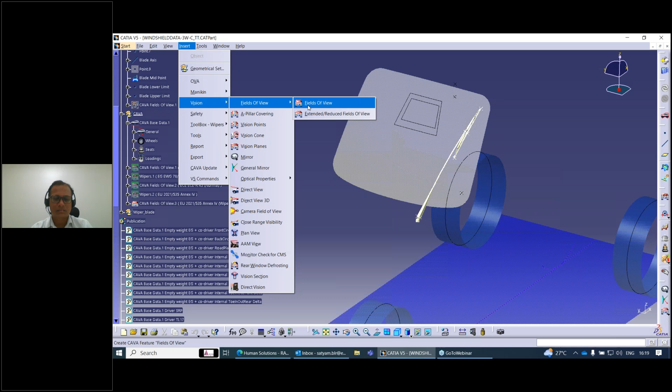Now I want to show you something for the vision, or maybe for the wiper analysis. I'll just minimize this. And now you can see we have another geometry where I have the windshield of a three-wheeler and the wiper. So now I'm going to insert, and in insert we have vision, and in vision we have the field of view. Now I want to check the field of view. Based on the field of view, I want to check my wiper analysis, so that I know the wiper area is passing the regulation, the norm which I want to check.

So now, for example, here we have the EU 2021 for the wiper. So I can check it, select the base data again, and select the screen here, and you can see I can check the daylight curves also if I want, and you can see the wiper A field and B field which are created here. There are some cases where a company has their own norms and regulations, or as per our AIS, we can add the AIS regulation inside this also.

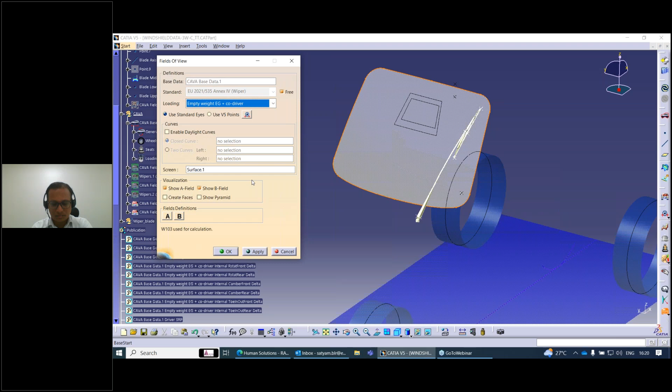Or, for example, let's suppose you have some regulation which is different. I can click here free, and I can change the detail which I need. Now I can give my own custom values with respect to the standards and check further details. So I'm not creating this field of view again, which I have created already. Now I'll just do the wiper analysis. So you can see here for the wiper, we have created the points, the driving axis, the blade points.

So again, I'll go to insert, and here we have the tool wiper. Once I click on the wiper, a dialog box will pop up. And here we have the base data. I'll just select the base data, and I have a couple of standards here. So we can see ADR, US FMVSS. Now I'm going with the 2021 because the FOV which I have created is for the same. So I'm just clicking here, field of view.

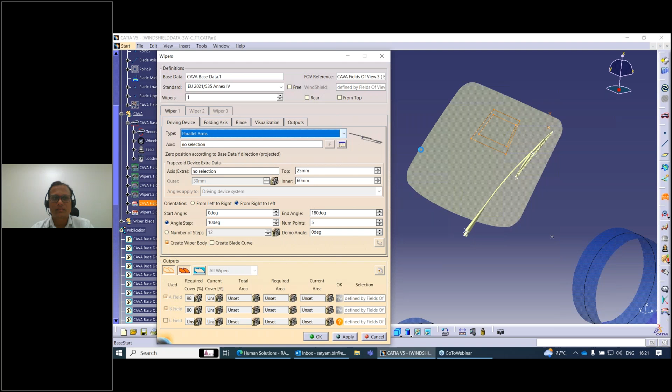And if you don't have the field of view, you can select your entire windshield. So the number of wipers you have, the type of wiper you have, the type of driving device you have: standard, trapezoid, or parallel arm. So that's something you can simulate here. And then further here we have to define the axis. For example, I'm going for the standard, so I'll select my axis.

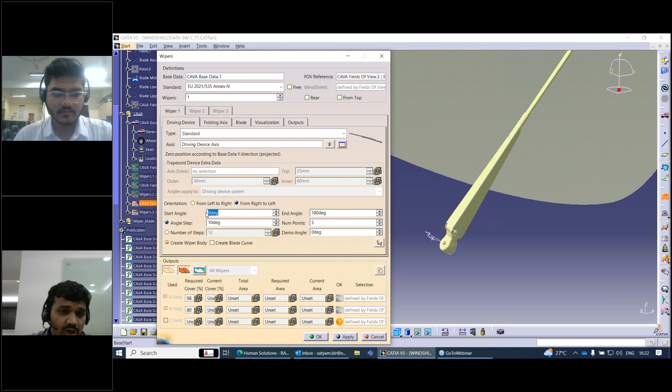So my driving axis I selected here, and then I'll give my starting angle. And so now, similarly, I'll do one thing here. I'll give my parameters for the starting angle and the ending angle for my values. So here I'm just changing my values and the orientation from where the wiping area is happening. It could happen from left to right or right to left.

If you have two wipers, then both the wipers function differently. That is something, orientation, you can add here. So I'm just quickly giving this value so we can finish this, because we are also running out of time. So I'll just start the angle. I'll just put it as 110 degrees, and the angle would be 120. I'll just keep it, and then here I'll go, and I can check my demo angle also.

So demo angle is something where it will create another wiping 2D diagram to check how the demo angle is forming or how this current blade is happening. So I'll just click here, and then I'll check the details, like for example now folding axis. So I'll just select my folding axis. Yeah, I'll just click on keep link so it will be remembered. And then further I'll go for my blade. Yes, select my blade as well.

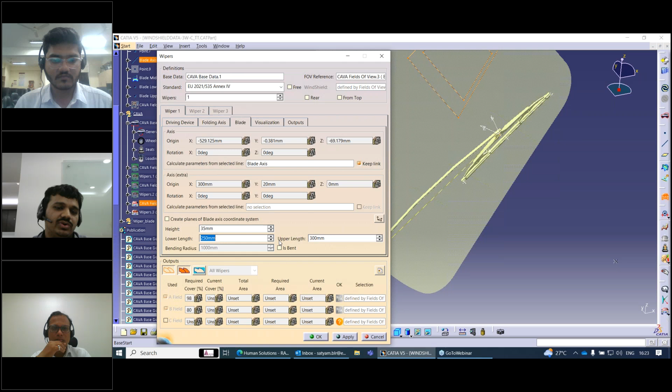So I'll select my blade axis as well, and then I'll give my height value. So these are the heights of mine. So for example, my height is 35, and the lower length is 250 to 300. For example, I'm just going with random values now. So I'll just click apply, and you can see the wiper is out of the kinematic range.

So suppose if it's out of the kinematic limits, CAVA will automatically reconfigure it, and it will tell you what the currently available range is, and then based on that it will show you the wiping area. Further, if you want to edit this parameter, for example I want to edit this parameter, similarly I can go again and change my value if I want. So now here I'm going and I'm changing my value, and I'll just simply apply.

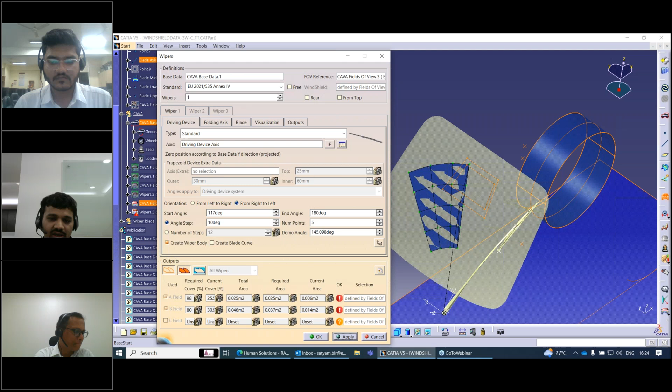So the moment I apply, I can see now the values are different. So here also I can change my differences. Now for example I can click again on the start angle. Let's say I want to make my start angle 117 and, let's say, 180, and I'll apply. So you can see now the entire range is taken into account, and apart from that, it is also covering the field of A and field of B.

And then furthermore, you can visualize your values with respect to grid points, color mapping, and you can showcase your values also. So show value and apply again. So you can see the values will occur here, at each and every instance, what degree values it is giving, and then further in the output you can check your wiping conditions. Now, different wipers you have. So I have only one wiper.

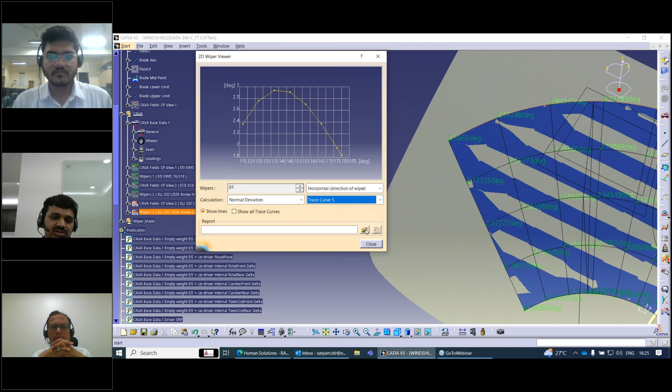I want to show the lines, and I want to see the folding axis, normal deviations, and the normal deviation with respect to the vertical direction of the blade. I can check that, or horizontal wipe, or the trajectory of curves. For example, we have created five instances, so how much trajectory each curve has. That's something I can analyze here, and further I can generate a report and save it, and later on I can use it. Yeah, so I'm just clicking OK. So this was it for the demonstrations.

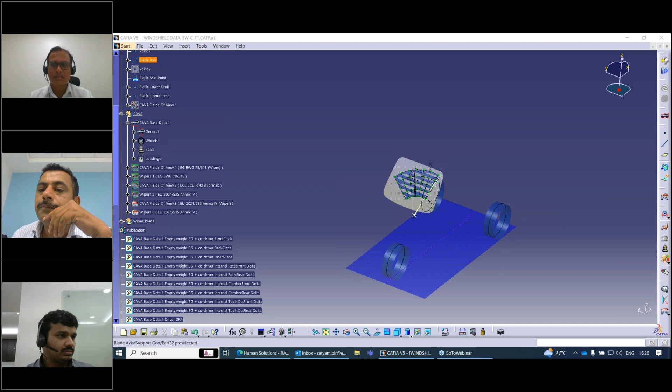Yeah. Now any questions, then please let me know. Now we'll move to the Q&A session. Sushil sir, over to you. Yeah, I'm presenting my screen now. I hope the demonstration was really interesting. So let me see if you see my screen. Is my screen visible? Not yet. Not yet. Can anyone please make me presenter in that case? Aniket, are you there? Yeah. You are now presenter, sir.